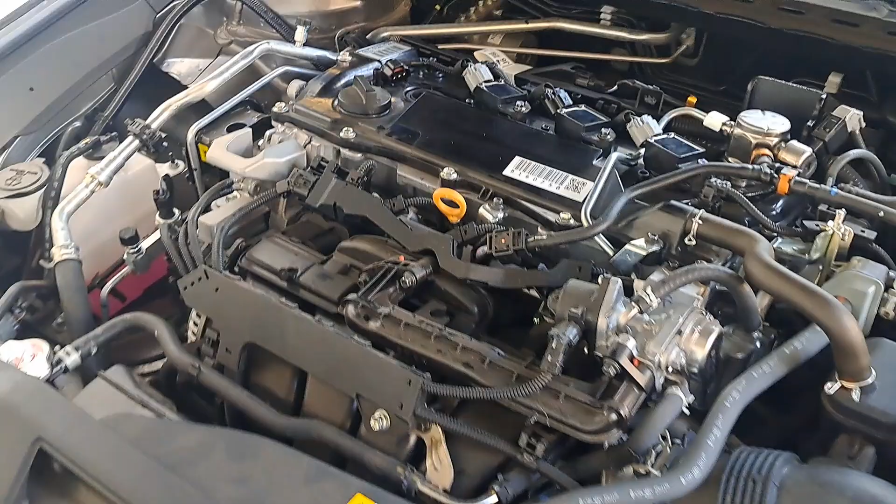So here we're going to do a compression test using Techstream. One of the early steps, get a battery charger on it, but also we're going to pull out a coil and a spark plug. So if we think about this right now, we have a 4-cylinder, cylinder 1, 2, 3, 4. We would assume cylinder 1 is going to have low compression.

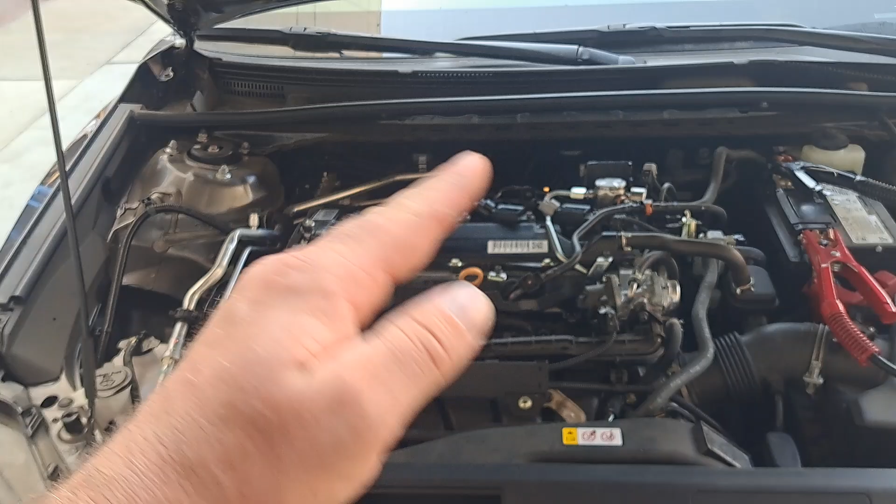You don't have to take any spark plugs out to do this test. You can do this test with the spark plugs in, but we're trying to make it fail, so we've made a low compression condition. Don't get confused. Now that we've made the low compression condition, we're gonna get prepped to do this test, and the instructions are a little vague. So when you come into active test, right here, you're gonna select compression test, right?

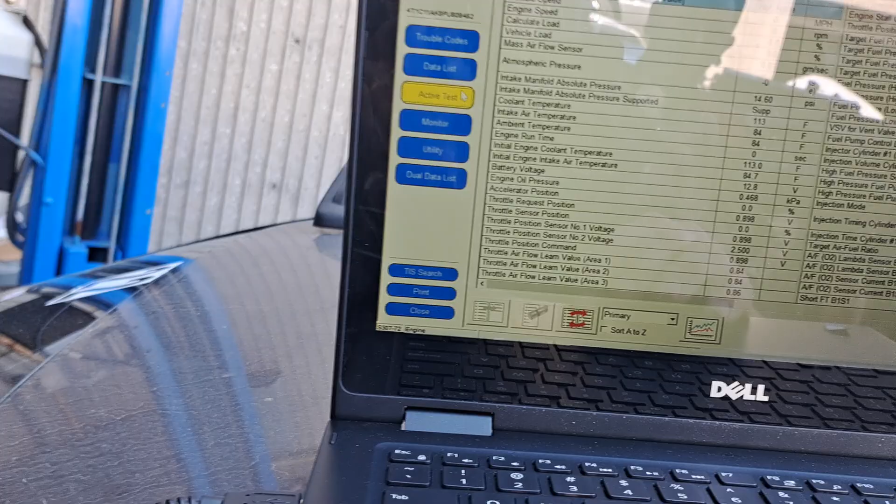So we'll even back up and we'll go right to there. Active test. We got quite a few options right here. Check, check, check. We can also do our power balance right now. Did I miss it?

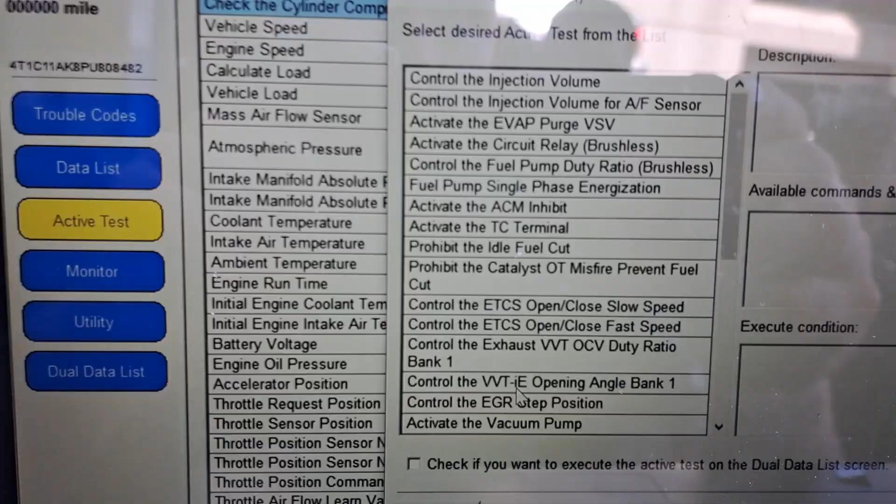Don't mind the ding-dongs in the background. Shut up over there.

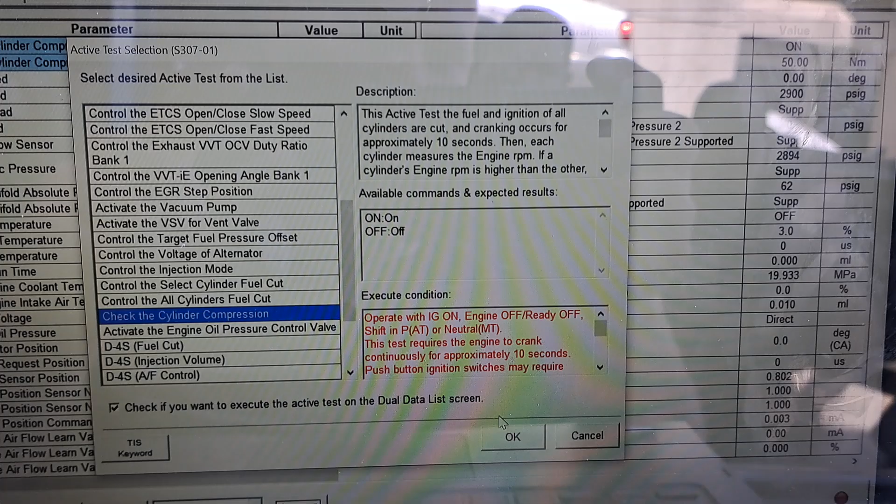Check compression. Okay, there we go. Okay, and then it gives us some conditions. One little detail, it's going to be for 10 seconds. So you got to do this kind of quick. Once we hit the test, you have to crank it for about 10 seconds, and you have to do it right away. Okay, so let's go with it.

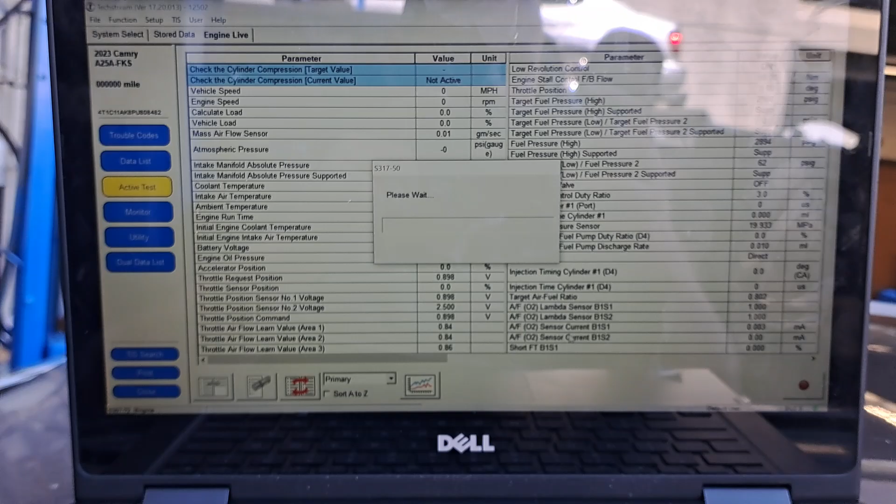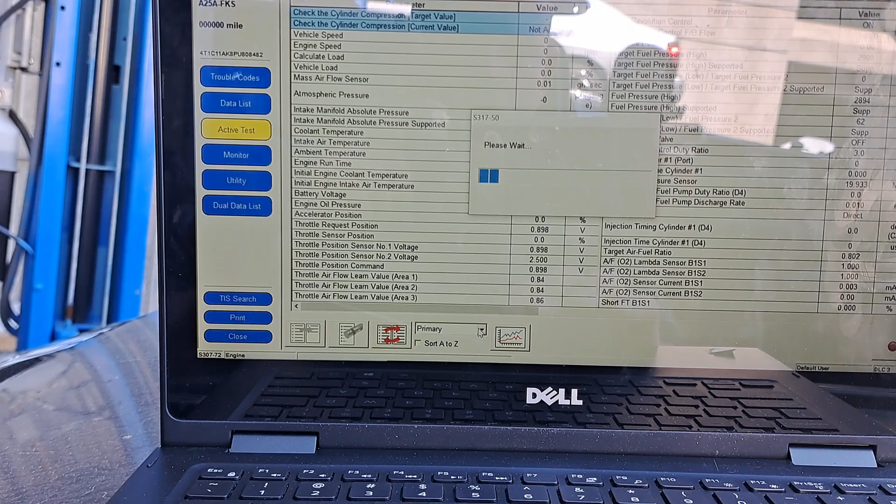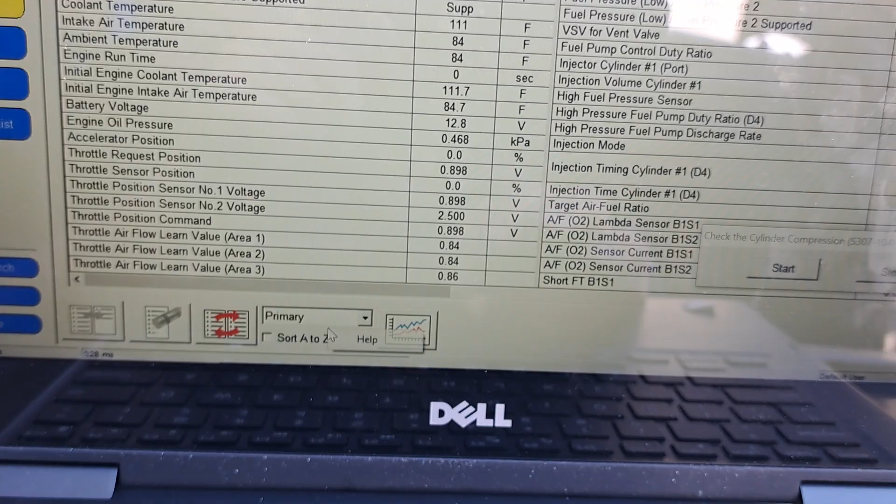And then right now, who wants to be the cranker? Oh, actually, we have one more condition we have to set up. Forgot, we got to get our list off of primary right here on the menu. All right, so you see we're ready down here, but the thing is we're not looking at the right stuff. So drop down menu. Okay, learn how to click, people. That's me. We're gonna go with compression only. Now this is going to come up, and let me explain it before we do it.

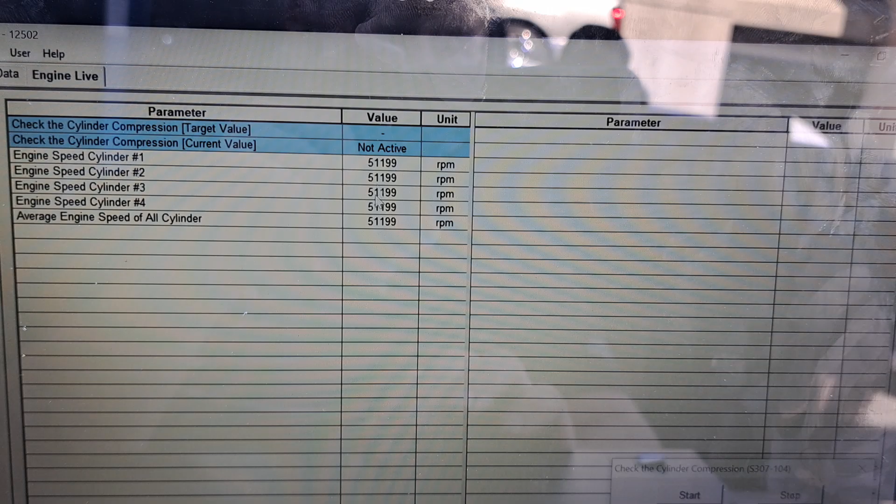It's going to show these crazy RPMs when we do the test, and it's going to be quick, so you're only going to see them for a second. But when we do the test, basically it's calculating when cylinder number 1 fires, how many RPMs does it make, right? And then we're going to lie. Let's just say it goes 1, 2, 3, 4 firing order. When cylinder number 1 fires, how fast? When cylinder number 2 fires, how fast? When cylinder number 3 fires, how fast? When cylinder number 4 fires, how fast?

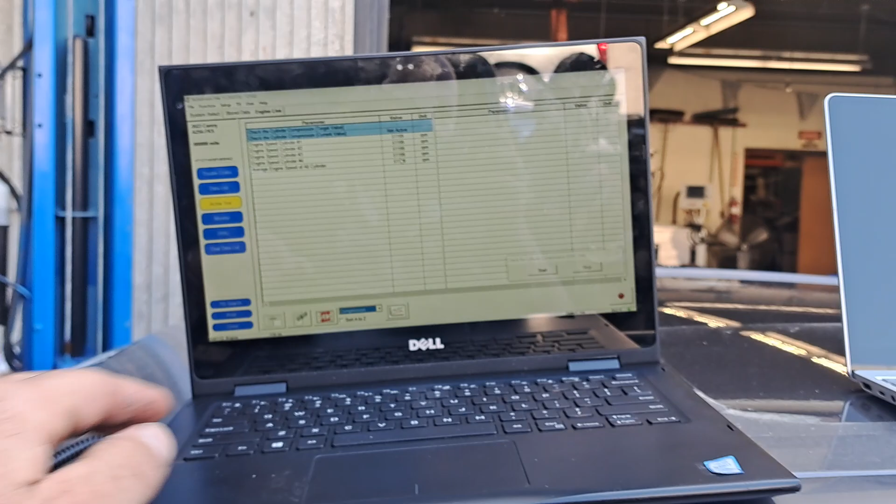Or the other way to look at it is going to be when the cylinder's coming up, how much resistance is there, right? So this is going to basically run a test, and you're going to look at the numbers on cylinders 1, 2, 3, and 4. Predict which cylinder is going to have the issue.

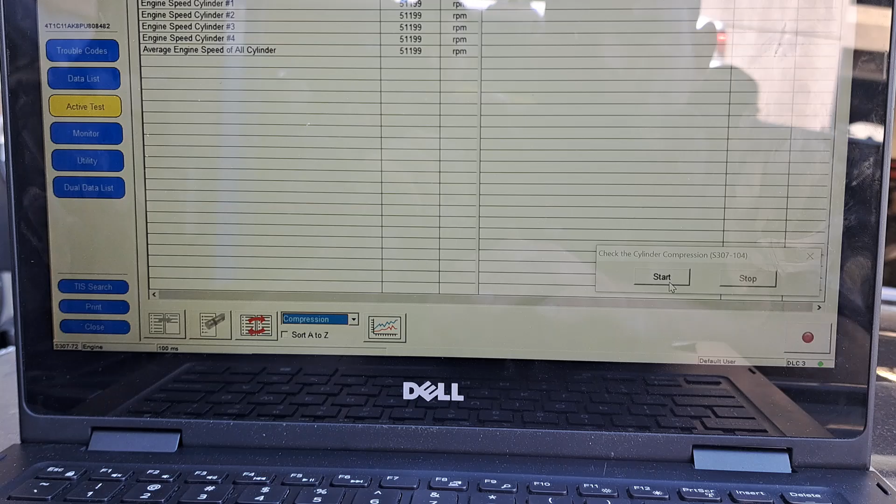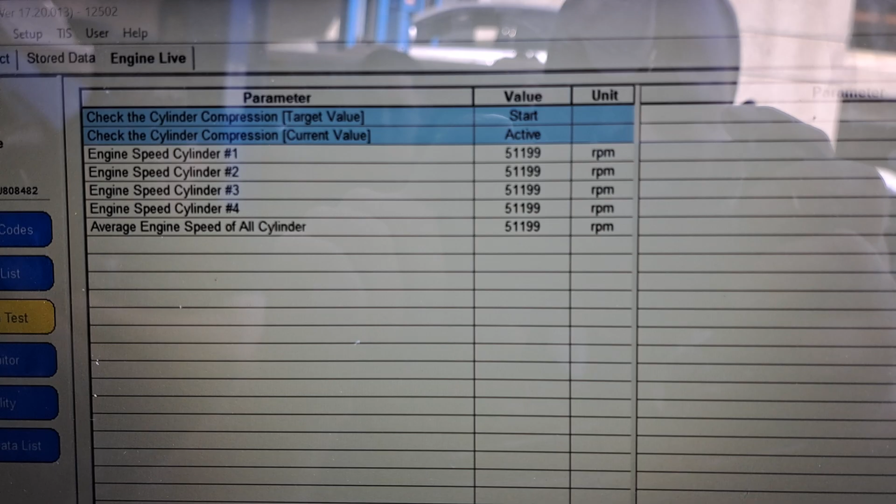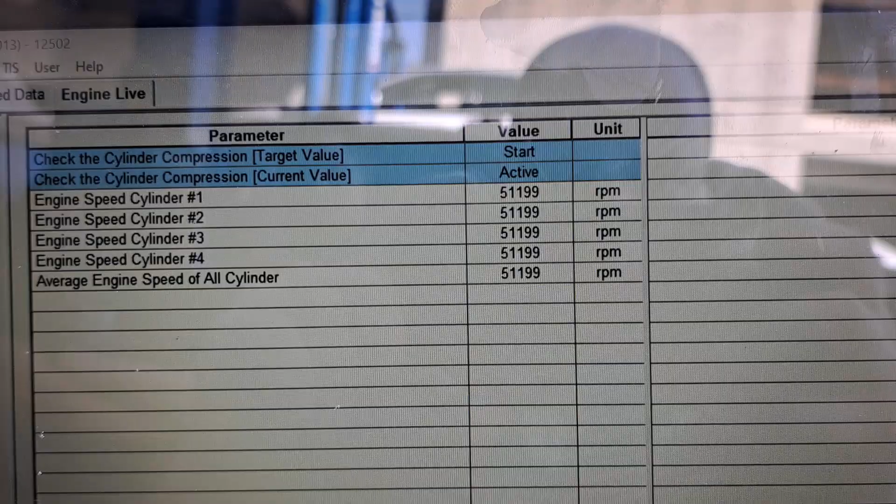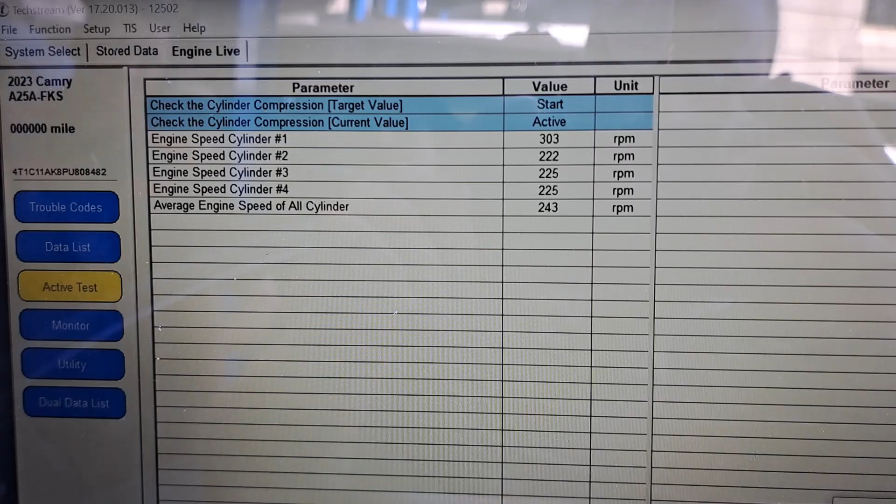Alright, so rerun. I forgot, this one is a little tricky. You have to really communicate with whoever's going to crank it or do it all yourself. You have less than 1 second from the moment you press start and he cranks. So we're going to do this countdown. Ready, Ben? Ready. 3, 2, 1, crank. Okay. Let it go. You're good.

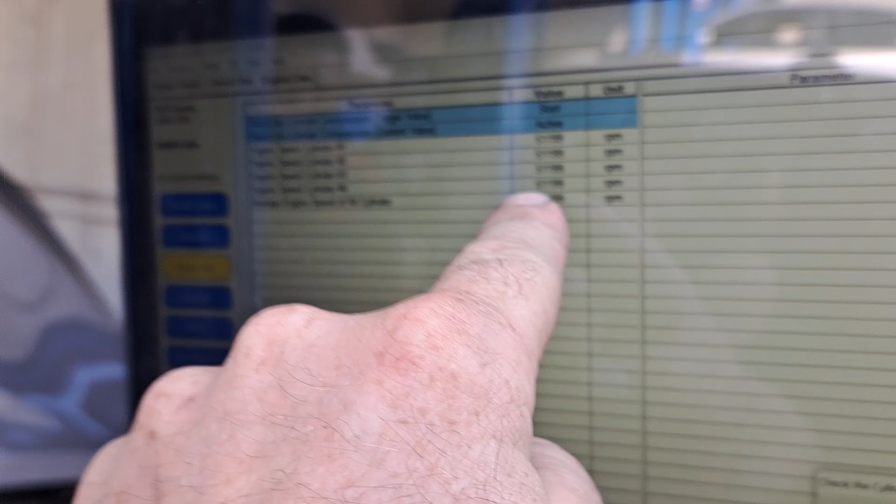That 303 was the issue. So let's say we had 200 and somethings over here, 200 something in cylinder 2, 3, and 4. Why did we have 303 on 1? Because remember, it's really measuring how fast that cylinder is moving. So when cylinder 1 was on compression, the crankshaft was able to reach 300 RPMs. Why? It doesn't have the compression pushing down on the... Exactly. So when the compression's low on 1, you'll have a higher RPM because there's less resistance.

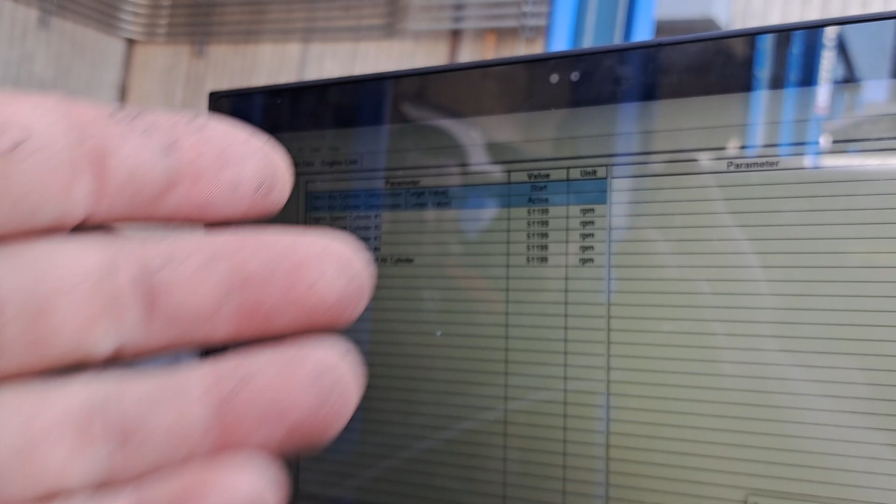Now that's how we do the test. What's kind of weird is when it sets a misfire code, it's actually measuring the acceleration while it's running. But when we do the test, we're actually measuring the deceleration while it's compressing. See what I mean? So it's a little weird, but that was the test.

So we would therefore know cylinder 1 has an issue. Right now, could it be a bad coil, a bad spark plug? No, because they're out. They're not even part of it. The measured cylinder compression is 100% mechanical. It has nothing to do with, let's say, even the injector. It's all really got to do with compression. So if you get a high number on cylinder 1, that means it has low compression. Now we'll probably go to the leakage tester and whatnot. You like it?